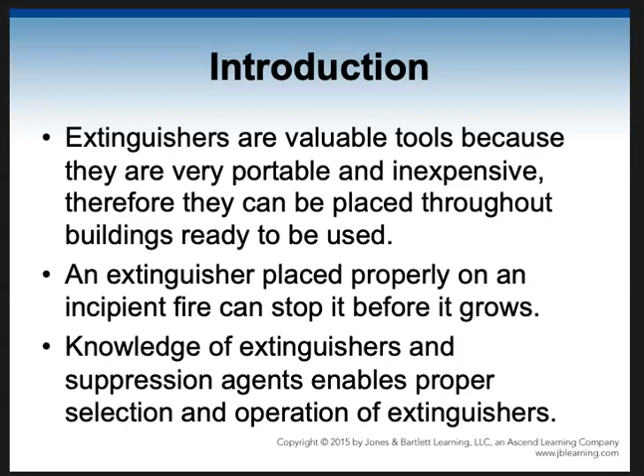Usually they're within 75 feet of you, spaced at 150 feet. Depends on the situation. But yeah, they're all over a building and they're really easy to use. When placed properly on a fire, especially in the incipient stage, it can put out the fire before it gets out of control. So they're really valuable. Knowledge of extinguishers and their suppression agents, though, makes sure that we have the proper selection and we use them correctly.

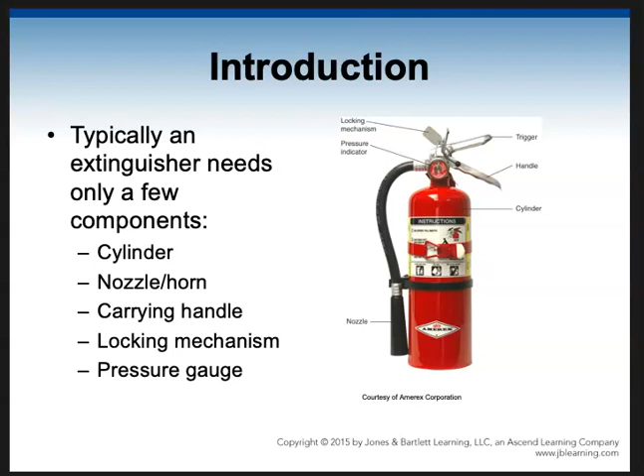So a basic fire extinguisher, they almost all have the same parts. We'll see some exceptions. They'll have the cylinder itself where the product is. They'll have a nozzle or a horn where the product goes out of the cylinder. They have a carrying handle, which also doubles as the mechanism. They'll have a locking mechanism, which is oftentimes just a pin, and then the handle also has the trigger, and then a pressure gauge. Not all of them have a pressure gauge, but almost all of them have all the other parts.

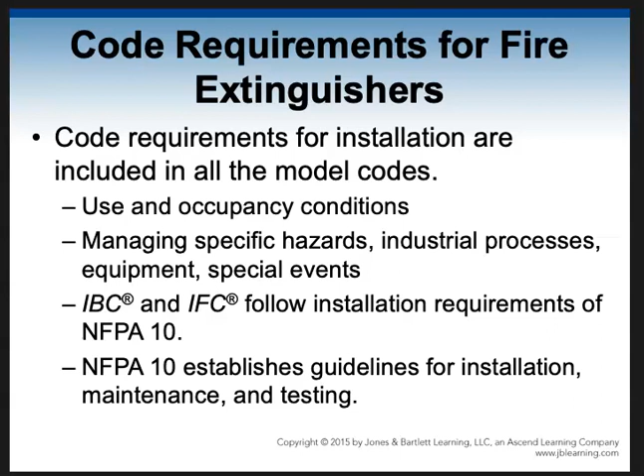So how do we know where and when and how to place them? Well, the code tells us. Code tells us what to do, and of course the standards are going to tell us how to do it. But pretty much the code is pretty clear on extinguishers, where to put them and what kinds. The International Building Code and Fire Code and our California version have the installation requirements, and then NFPA 10 gives us the installation, maintenance, and testing requirements, and they're the standard. So NFPA 10 is our standard, and then in Chapter 9 of the Fire Code and Building Code, we have our installation requirements.

Now, as we've seen in talking about the different kinds of products we're going to use to put out different kinds of fires, our extinguishers are rated by the kind of fire that they're good for. So Class A, ordinary combustibles. Class B are flammable liquids and gases. Class C involves anything that's energized electrical equipment. Class D are combustible metals. And K, of course, our newer class, been around since about the 1990s or early 2000s, for kitchen fires, for the different kinds of cooking media and oils and fats that are highly combustible and operate at high temperatures.

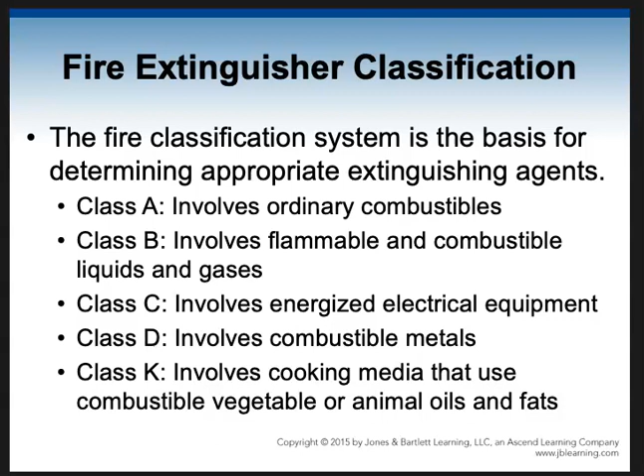So like our different fire protection systems that we've talked about so far, we're going to use about 7 different products that are good for fighting fire. And of course, first of all, water is extremely good on Class A. So this little chart is in your book, Table 11.1, and it's a really good little chart showing, okay, depending on what kind of fire it is, what kind of product is best for it. We'll talk about each one.

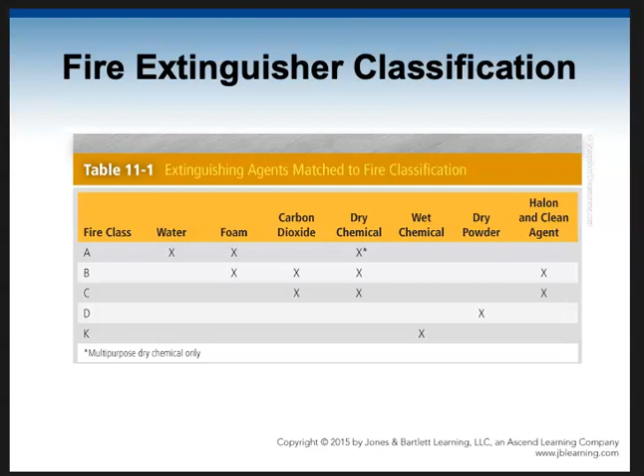So it's going to use the same lettering system to classify the extinguishers as we use to classify the fires. So if you have a Class A fire, you want to use a Class A extinguisher or an ABC. If you have a C fire and you have an extinguisher that's only labeled for A, that's probably just water in there. Put water on energized electrical equipment, you're just going to make the situation worse. Okay, so some extinguishers we'll see are A, AB, ABC, and BC. So it depends on the product they're using and what they're intended for.

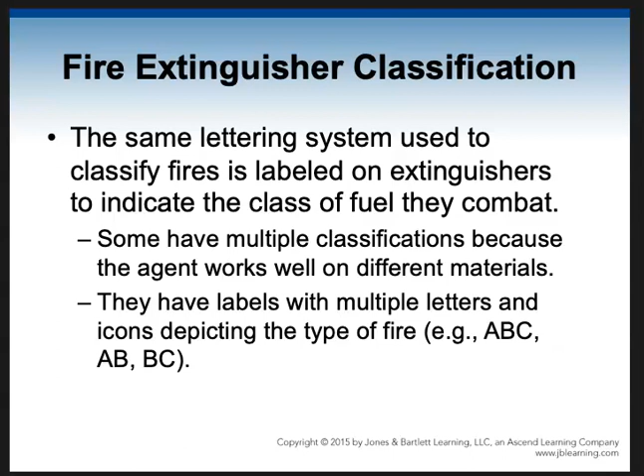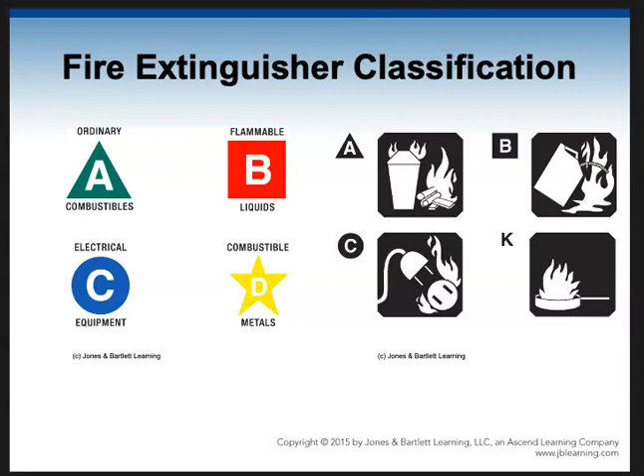So, on the sides of the extinguishers, they're going to tell you what they're good for, and they use the symbols like we see here on the left and pictograms like we see on the right. That's more of an international type of thing.

So, getting back to the agents, water, of course, is going to be great for Class A fires. We don't want to use it, though, on Bs, Cs, Ds. All of those situations, they make it worse. And K. So don't use water on anything except for Class A fires.

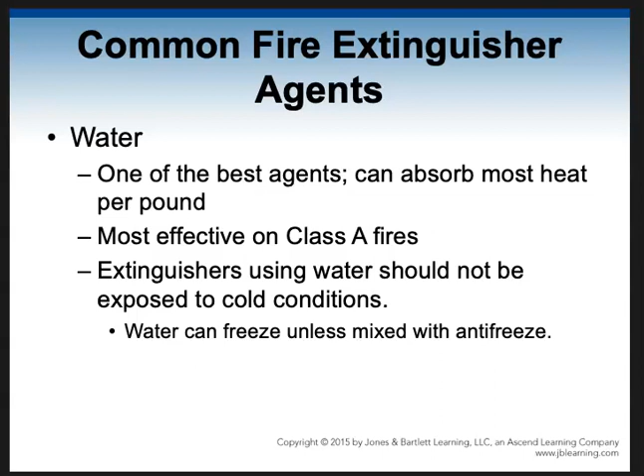Now, I used to have one of these cool Class A water extinguishers, and it was awesome. I don't know why I sold it. I had 2 of them in my garage, and I sold them in a garage sale because I wanted to make more space in my garage. And now I deeply regret it, because you know what they're great for? Water fights. You fill them up to the level where they're supposed to be filled up with water. Then you put the lid back on. You take a compressor, and you shoot up the pressure gauge to the maximum that it's supposed to go. And then, baby, that thing will shoot across the street. We used to take them with us to Hume Lake and fill them up and drive around the streets and squirt people when we'd drive by. It was fun. But, I sold it. Oh, well.

Of course, with Class A and B fires, you have to use the right product: Class A foam for Class A fires, Class B foam for Class B fires. But foam is another great product. Creates a vapor barrier, thus suffocating the fire. There's 2 basic types, AFFF and FFFP.

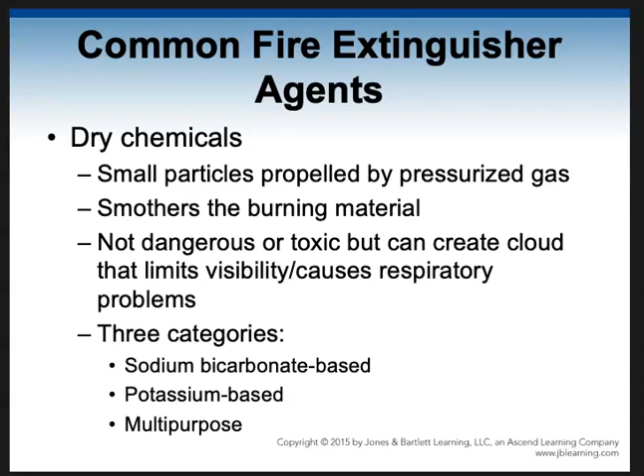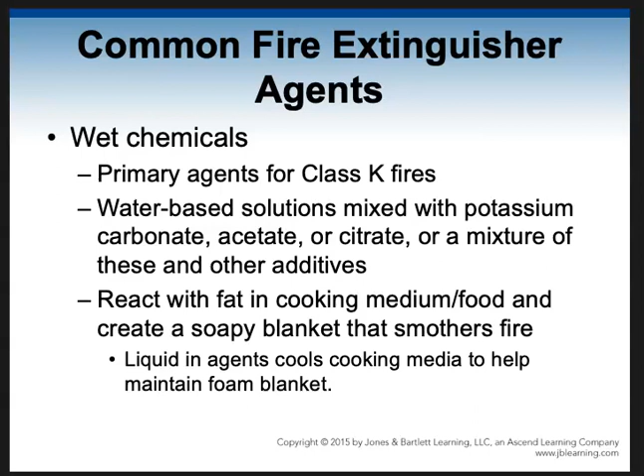And then we got the combustible metal extinguishing agents, or dry powders. And they are for our Class D combustible metal fires. So there's no one powder for every kind of Class D material. So these are going to be in places where they manufacture metals, where they work with lathes or metal plating, and all of these kind of places where they have a lot of combustible metals. And they're going to have the powder that's specific for their products. Usually, these kind of places don't get big fires, though many of you might have seen the big fire that LA Fire Department had at a metal plating plant.

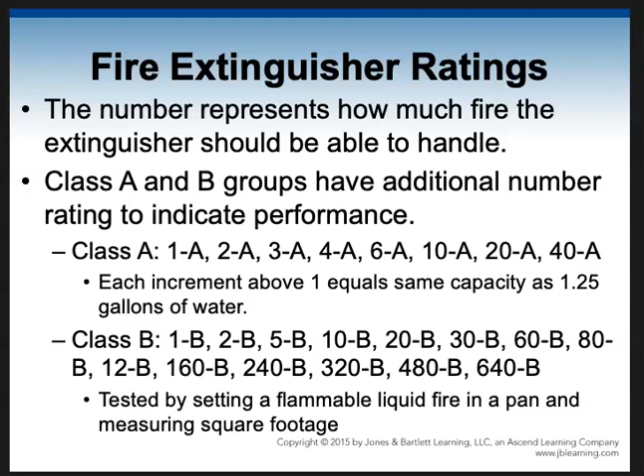So they rate them, and they give them a number rating. Of course, you have the class, that's the letter A, B, C, D, K, and then the numbers usually have to do with how effective it is. You can look in the book and see some of the charts that go with this, but it explains how they rate them. The A and B have number ratings, so you'll have a 1A, 10BC type dry chem extinguisher, or a 2A, 10BC. That's a very common one. And it basically is saying how much fire the extinguisher can handle.

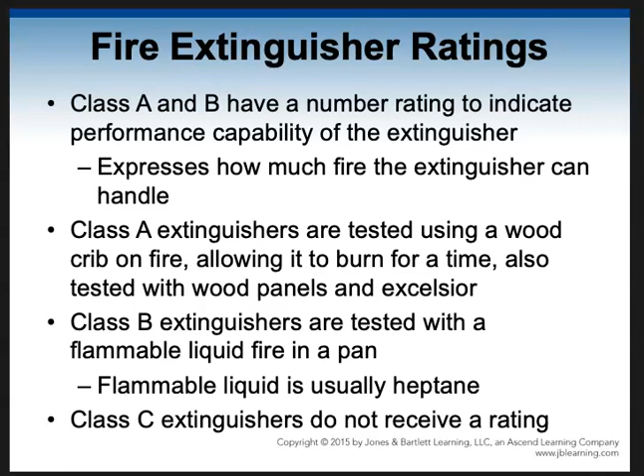So if you have a bigger facility or bigger hazards, you might have a 40BC, 10A 40BC, or a 2A, whatever. So these numbers have to do with what they can put out. They're tested and rated like this. So with the Class A extinguishers, they use it on a wood crib, and I'll show you a picture of that in the next one. And the Class B are tested in a flammable liquid fire in a pan like we saw in the photo a couple of minutes ago. The flammable liquid is usually heptane, and the Class C extinguishers, they don't receive a rating. And I'll explain that to you in a second.

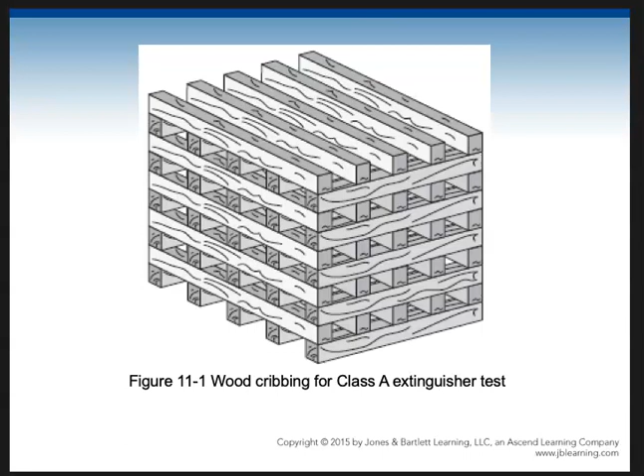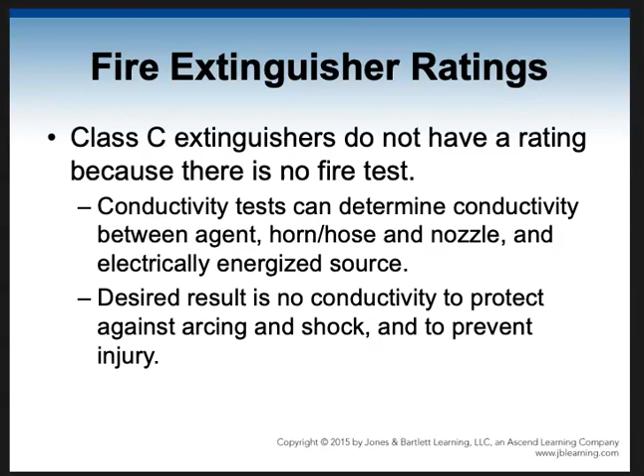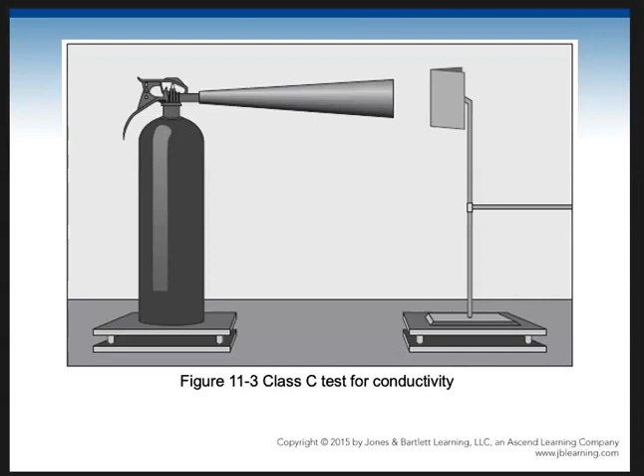So this is typical wood cribbing that they would use when they're testing how effective a Class A extinguisher is. The Class C extinguishers, what they're concerned about is how conductive the material is. If it's conductive at all, it can't be rated C. If it's not conductive, then fine. So no conductivity to protect against arcing and shock and all of those kinds of things. So they have these tests that they do. They'll spray the product to see if it conducts electricity.

So that was the classes of fire and the different kinds of agents. And now we're going to talk about the different types of fire extinguishers. Classes of fire extinguishers correlate to the class of fire. I kind of said that wrong earlier. The types of fire extinguisher have to do with how they work. So there's pump extinguishers out there. They're not as common anymore.

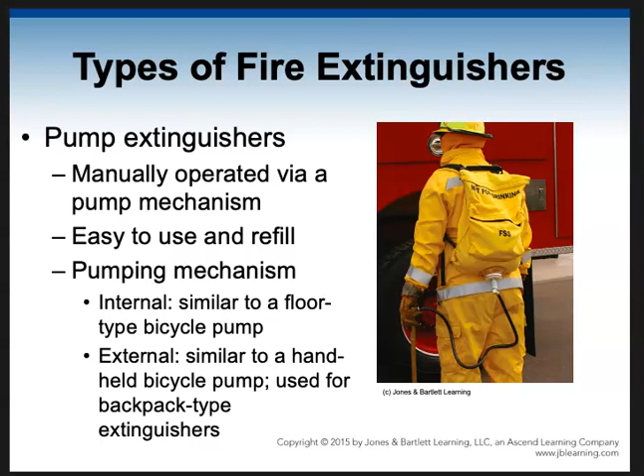There used to be a lot of pump extinguishers in the early days before they figured out better ways to make them work. But wildland firefighters use pump extinguishers like this 5-gallon backpack type extinguisher that might have a mixture of water and Class A foam, or it might just be straight water. So these work with a pumping mechanism that's similar to a bicycle pump. And some of them are used in a backpack type situation here, or some of them are a typical container where you just hold the container and you have to pump it. Not as common.

Most of them are stored pressure extinguishers. That's probably what you're going to see more than anything out there. And these are the AB, the ABC type extinguishers. And they have either air or some kind of a pressurized gas that is mixed with the agent in the tank. So a stored pressure extinguisher has the product that's going to put it out and a propellant in it, whether it's air under pressure or a gas.

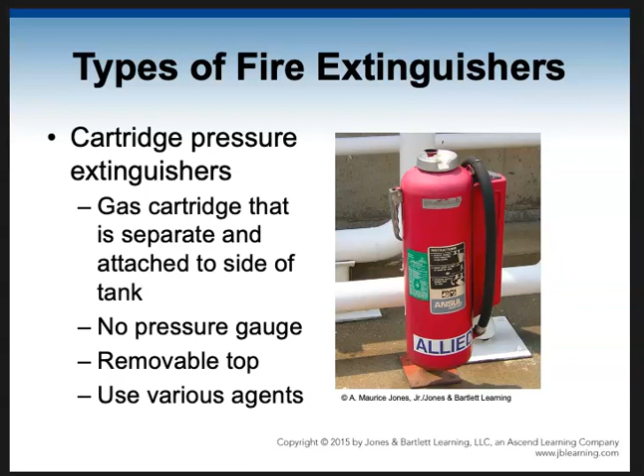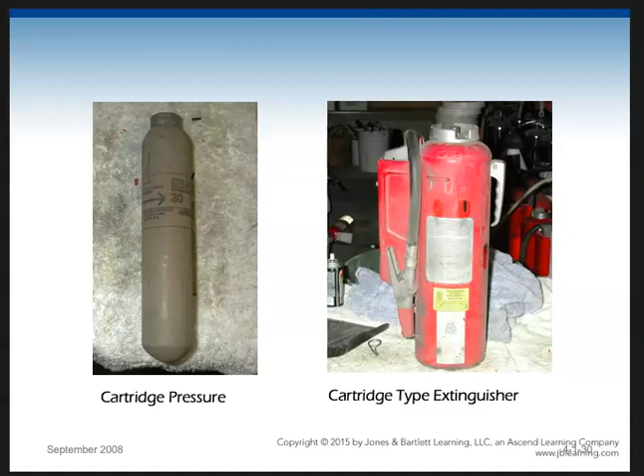And here's a typical one of the cartridges. For those of you who do paintball, it's like a very big version of those little CO2 cartridges you use on your paintball guns. And then you can see the extinguisher on the right.

Now, there's some obsolete types of fire extinguishers out there. Very rare to run across them anymore still being used, because most of them don't work anymore. They have corrosive products or conductive products, and they've been banned from being used.

Now, where you do see them, I've got one here in my house that somebody cut the top off of, and it's copper, and it's really cool looking with lettering on it, and we use it for an umbrella holder and cane holder. So, yeah, that's about all they're good for. Some people make them into lamps or put them out in their backyard or whatever. It's decorative. Don't use them anymore.

Soda acid, the carbon dioxide extinguishers with the metal horn because the metal was conductive, all of those have been eliminated. Well, how do we use them? Most people with little or no training can use an extinguisher. You pull the pin and you squeeze it. But we try and teach people to use the PASS method. And most of the time, those instructions are going to be on the side of the extinguisher.

The PASS method is pull the pin, aim the nozzle, squeeze the handle, sweep at the base of the fire. Pull, aim, squeeze, sweep. So everyone should be aware of where their extinguishers are where they work. You should notice that if you've never had it pointed out to you, but remember where they are because you might need them someday.

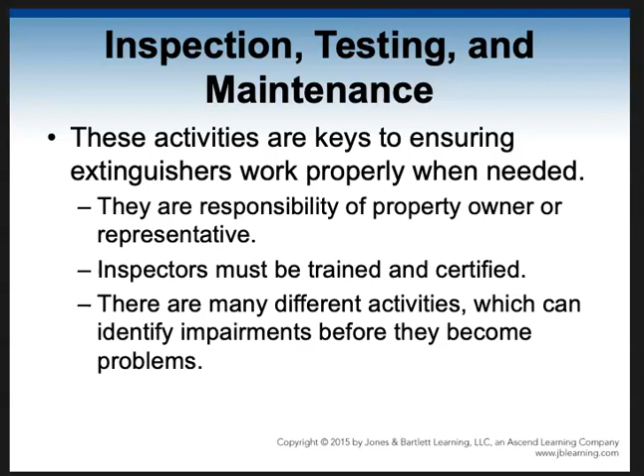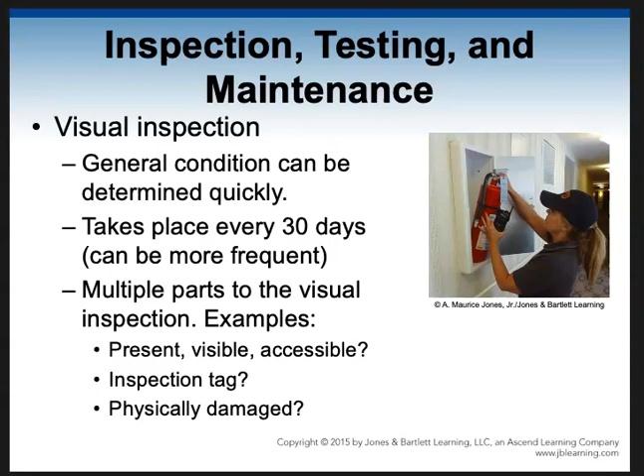So the inspectors must be trained and certified, and only certain companies are certified to maintain them. So a visual inspection, they just want to make sure that it's there, that if it's a stored pressure, the pressure gauge is in the right place. It's supposed to be done once a month, just making sure it's there, it's visible, it's accessible, it's hung correctly, the tag is still there, that it's not physically damaged, and there's pressure in it. When you do a visual inspection, you also

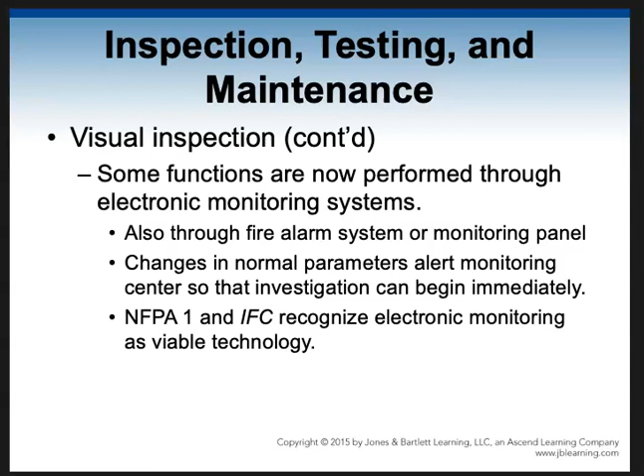Some functions are now performed through electronic monitoring systems, a fire alarm system or a monitoring panel. I've never seen one of these, but they're out there. The maintenance has to be done per the manufacturer's requirements and per the State Fire Marshal's requirements, which is usually annually. Sometimes they take all the product out, sometimes they don't. It just depends on what the requirements are.

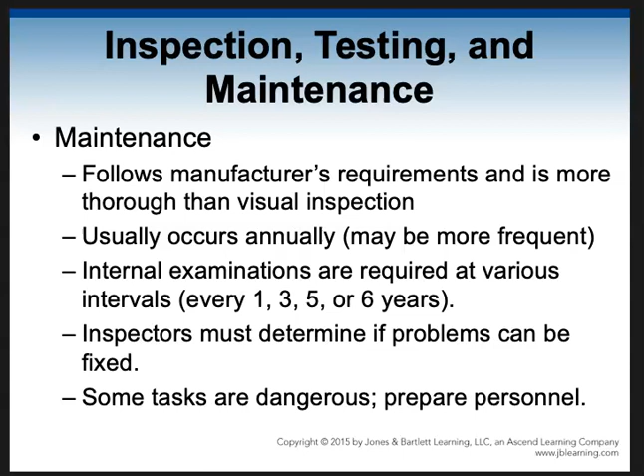Inspectors, when we are inspecting buildings, we want to go out and make sure that they're tagged and that they have been getting their regular maintenance. Because a lot of times businesses trying to save money don't want to do that maintenance, and they postpone. And so we've got to make sure that they do it. It has to be done by trained personnel. Now, every 5 to 12 years, depending on the extinguisher, they also need to be hydrostatically tested.